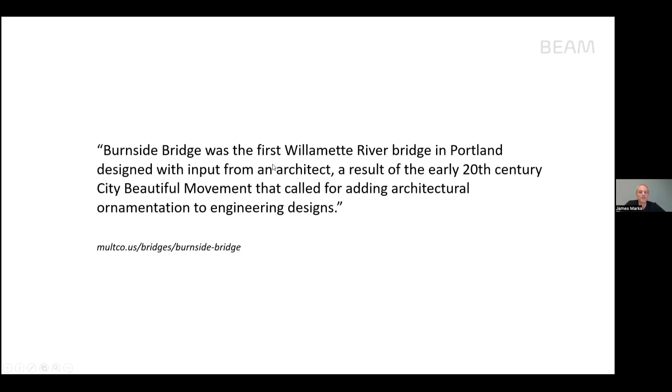The flowing lines of these bridges are responses to spatial conditions on the bridge deck and also to the bending moments on the structural members. The structures are deep where they need to be to resist the loads imposed by gravity, but are also shallow where they can be for the economy of materials. The bridge architecture is driven by the bridge engineering, and not the other way around.

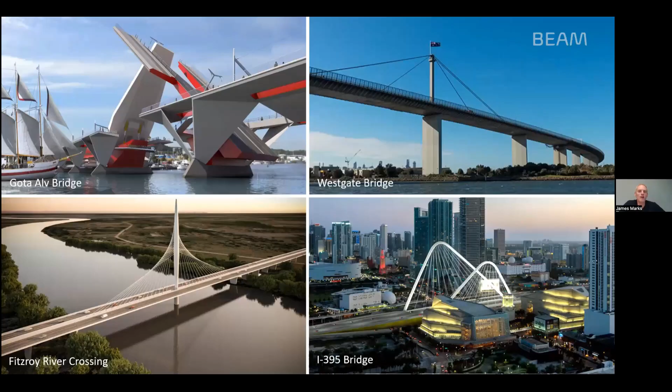For all our projects, as architects we need to understand the flow of forces, as well as how the arrangement of cables, pylons, and arches can affect the spatial qualities of the composition and the experience for bridge users. We work with bridges at different scales across all typologies and modes.

Increasingly, bridge owners are realizing the benefits of employing architects on very large infrastructure projects. The two bridges at the top of the page are the Long Beach International Gateway, a large cable stay bridge in California, and the Frederick Douglass Memorial Bridge, a multi-span arch in Washington, DC, both completed a year or two ago. Bottom right is the Mumbai Trans-Harbour Link, which opened last week. This is a 22-kilometre viaduct across the sea in India, where we were appointed to bring some design cohesion across proposals from 3 different construction consortia.

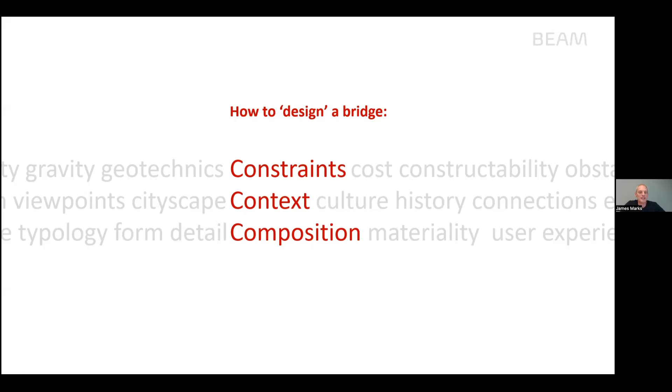If we had to distill what we do into 3 processes, this would be it: constraints, context, and composition, in that order. I'd like to explain what I mean by these criteria as they relate to bridge design specifically. I'm going to describe these in reverse order, starting with composition. The composition or form of the bridge should be tailored to respond to the specific set of physical constraints and the unique urban context of the site. For us, composition encompasses materiality, spatial qualities, user experience, form, detail, and anything that affects how you perceive a bridge and interact with it.

Unlike designing a building, bridge design is limited to a very narrow set of basic typologies. This is a slide from another project, but it demonstrates the 5 basic ways of bridging an obstacle, from shorter span simple beams and girders at the top of the page to longer span suspension bridges at the bottom. As you work down the page, not only do the spans get larger, but so does the cost. As bridge designers, establishing an appropriate structural typology is always our starting point.

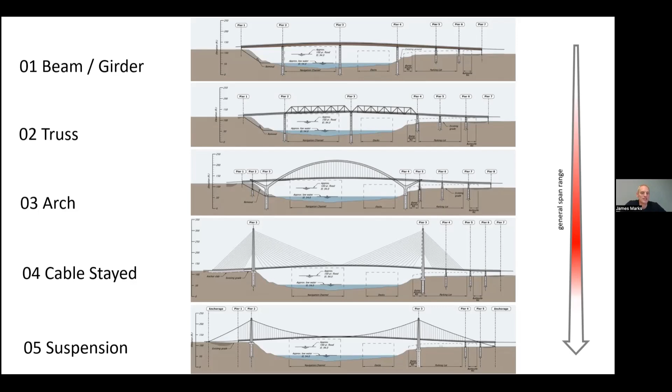The spans of the Burnside Bridge are somewhere in the middle of this range. We will most likely be dealing with trusses, arches, and cable stay bridges. The spans are too short to make a suspension bridge worthwhile, and the longer eastern spans will make girders an inefficient choice. So first from the pattern book is the truss.

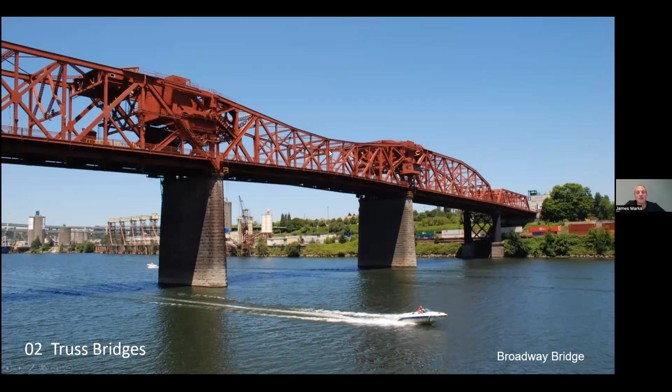This is the Broadway Bridge, which you all know, and this is probably the sort of structure that most people have in mind when they think of a truss: a lattice of braced members creating a ride-through structure. But trusses don't have to look like this. Here are some trusses from our own portfolio. You can see that the truss as a typology can be delicate, and it can be spatially beautiful. It doesn't have to be a clunky, heavy mass of members.

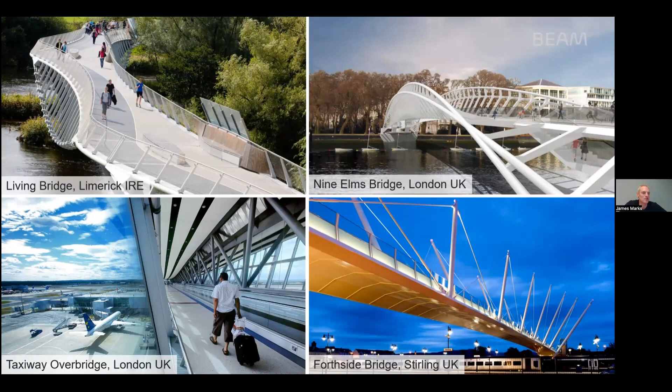And the same is true for arches. You all know the Fremont Bridge with its delicate braced arch profile, which dives below the deck to bounce back up to support the high-level highway.

But we used a similar silhouette motif for the bridge we designed in Boston, Massachusetts, bottom left. Top right is the Waaban Crossing in Kingston, Ontario, which has the appearance of a deck arch with the arch member below the deck, but is actually a framed girder. And bottom right is a light rail bridge we designed across the Bow River in Calgary. This type of structure is called a tied arch, where the horizontal thrust of the arch is resisted by tension in the deck, meaning that you only transmit vertical loads onto the piers.

The tied arch is likely to be a structural typology that would work well for the long east spans at the Burnside Bridge. And finally, to cable stay bridges.

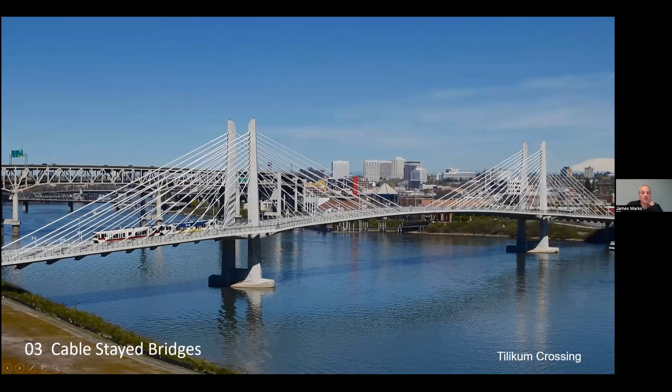The Tilikum Crossing, which you all know, is a fairly conventional cable stay bridge form with stay cables hung from vertical pylons supporting both edges of the bridge deck. But again, cable stay bridges can also offer extraordinary opportunity for expression, from the curved pylon of our bridge in Bahrain, top right, currently under construction, to the multiple masts of this bridge for the BBC in Salford, bottom right.

The same structural diagram can also work with solid members in place of cables. Bottom left is a bridge we designed in Melbourne, Australia, which is a cable stay bridge in principle, albeit with solid stays instead of cables.

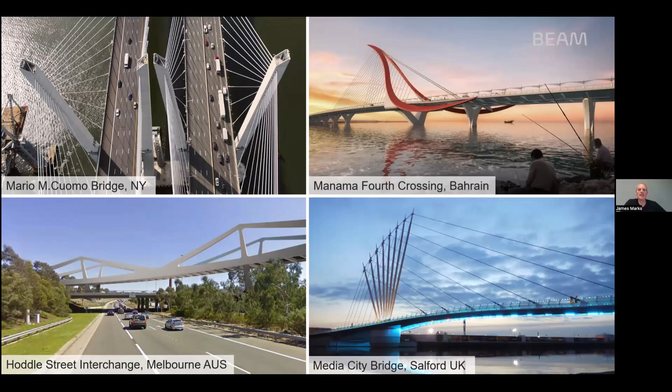Once we've established the basic form of the bridge, we then look at the detail. By detail, I don't just mean finishes such as railings and concrete surfaces, but more fundamentally, the shaping of the structure itself. We were commissioned to undertake the reference design for this bridge in New Jersey.

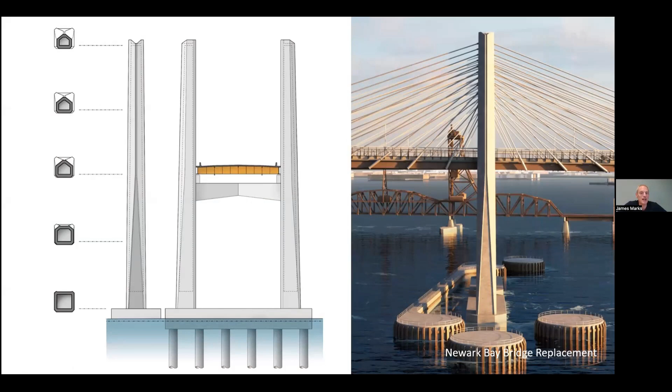It's a cable stay bridge supported from a pair of large pylons. Part of our role was to investigate how the light falls across the structure and shape the tower, not only to resist the forces acting on it, but also to break down its visual mass to give it this elegant appearance.

And similarly, for the structure of the Frederick Douglass Bridge, the arch has a tapered form which evolves as it curves overhead. From a profile that is deep at its root, where we're resisting shear forces, to a wide cross-section at the apex, where we're resisting out-of-plane buckling, all with simple geometries that are easy to define and fabricate.

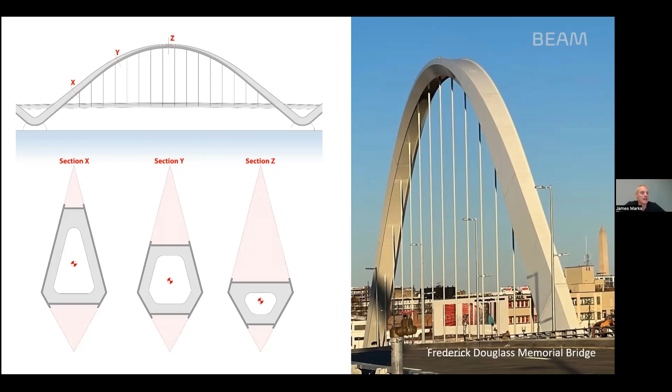But the composition of the bridge, the arrangement of the structural forms, all evolve from the individual constraints of the site. The Burnside Bridge has a very particular set of physical and geological constraints and a complex relationship with its urban context, which I'm going to hand over to Keith to describe next.

Keith, are you there? Are you on mute? Okay, sorry, I couldn't find the unmute button.

So this diagram isn't massively accurate, but as James says, it demonstrates a complex array of constraints. There are obstacles to span, no-build zones, clearances, maximum height moratoria, minimum height envelopes, and connections to make with geometric and operational issues.

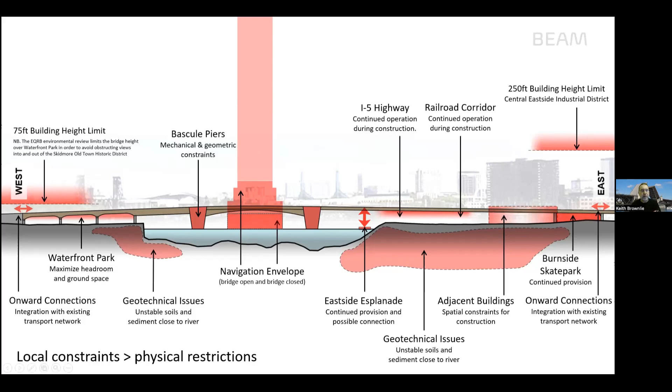I won't go into any of those. The most important constraint on this project is that it's fundamentally a life safety project. It's to be an earthquake-ready bridge, as you've heard—a seismic problem to navigate.

So you'll see words on the right which say the I-5 and railroad corridor, and beneath it a liquefaction zone, which means in an earthquake it's turning to liquid. All of that means you can't, or really shouldn't, put your feet down. So we have very limited opportunity for bringing structure to ground.

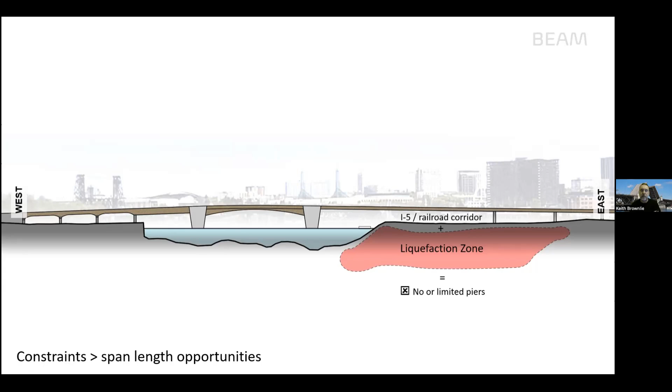If I could show you a pictogram, what that really means is this: on the east side of Burnside, when there's an earthquake, the ground turns to soup. And you need something long span to span over that.

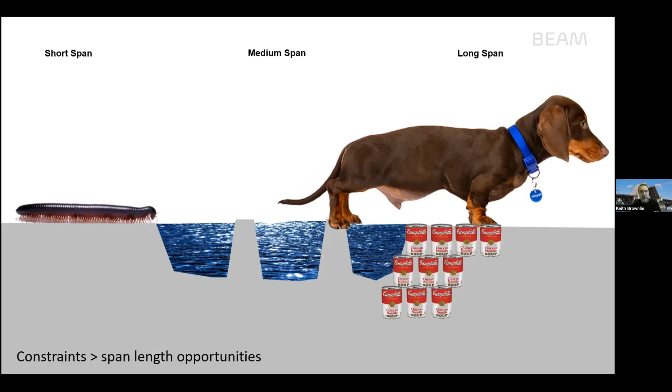Conversely, you don't have that issue, at least to the same extent, on the west side, on the left, so you can put your feet down as often as you like. Hence the millipede can exist on the west, but you have to have a dachshund on the east.

So if you convert that into a diagram—and to be clear, these are not designs, these are diagrammatic typological responses to that constraint—you can have short spans on the west, you need a medium span in the center, and you absolutely must have a long span on the east side.

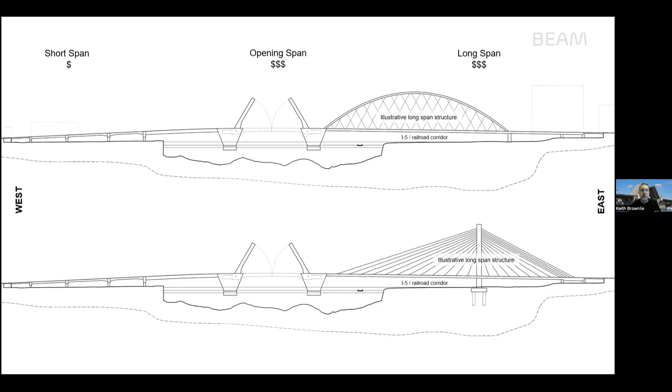And with those short, medium, long spans, you get increasing dollars. Unfortunately, the medium span is really two short spans, but they're very long when you're talking about opening bridges, so I'm afraid the dollars go up there as well.

I've talked about physical constraints, but of course there's a whole host of architectural and urban design issues at play as well. We're not preempting what might be the case, but you have real physical and cost constraints that drive you down a route on the east side, while on the west you can do what you like, notwithstanding other physical and urban design constraints. But realistically, if you're going to add a dollar sign to each of those spans, that takes some justification.

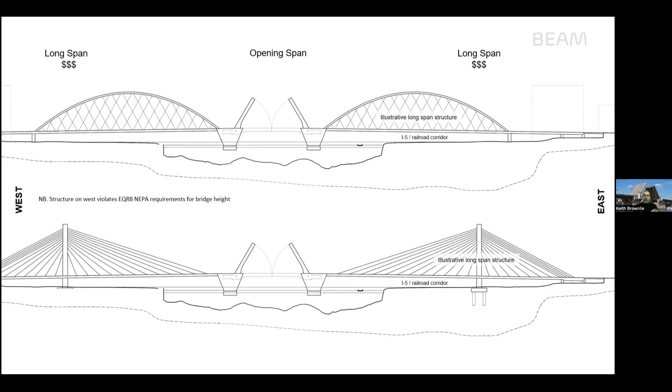So we've done this in reverse order, but in every case, what we do is about context. That's what makes architecture. Constraints make structure or make utility, but context makes beauty and, more to the point, makes appropriateness.

City of Bridges, Bridge City—it might not surprise you that because we only design bridges, every town we go to considers itself to be Bridgetown or the City of Bridges. But this is a significant river with a significant portfolio of bridges, historic and modern, crossing it.

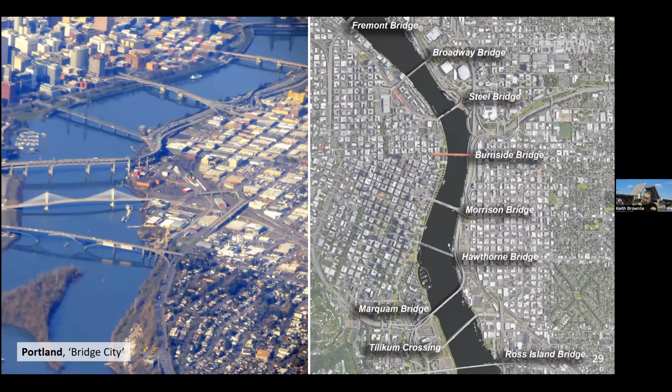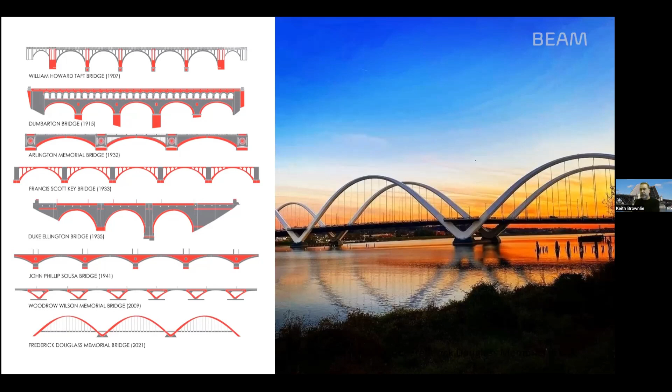They're not to scale—our bridge is much bigger than all of those. I wouldn't say it designs itself, but one would be hard pressed to stick a cable-stayed bridge in that collection of arch bridges. If you go to the next slide, however, this is Portland's portfolio.

It's a series of interesting bridges, but if you color code those typologically, there's a lot of colors, which means there's a lot of types. So the takeaway is we have a free hand, we believe, in typology terms, notwithstanding the fact that there are only six typologies, as James explained earlier. But we're not driven by one type or another.

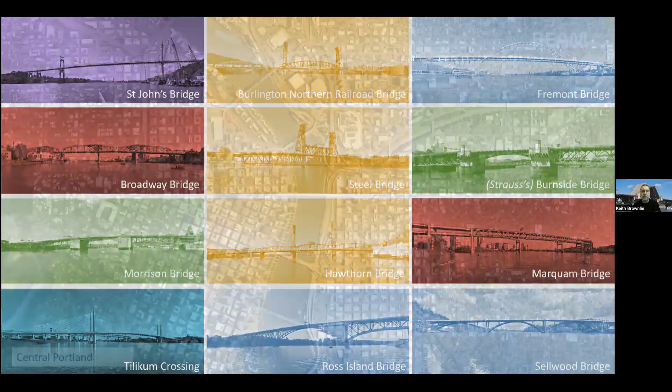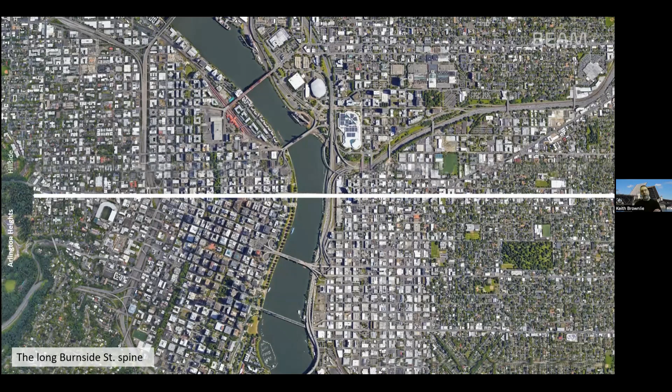So there is Portland. You might recognize it. The next slide shows you the significance, we believe, of Burnside. It's very interesting, Burnside. It's terminated by the hills on the west side, but it's almost sort of curvature of the earth on the east side. But it's a real spine—it's the spine of Portland's book.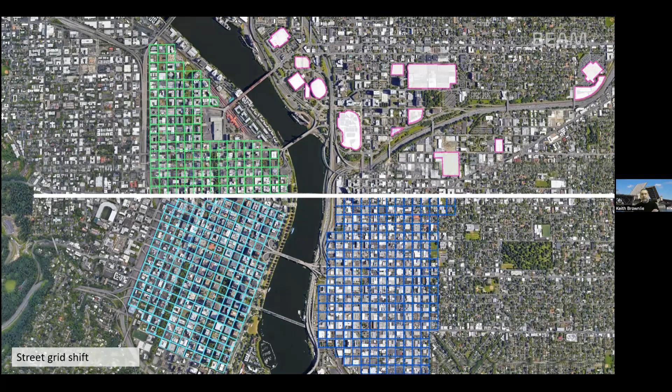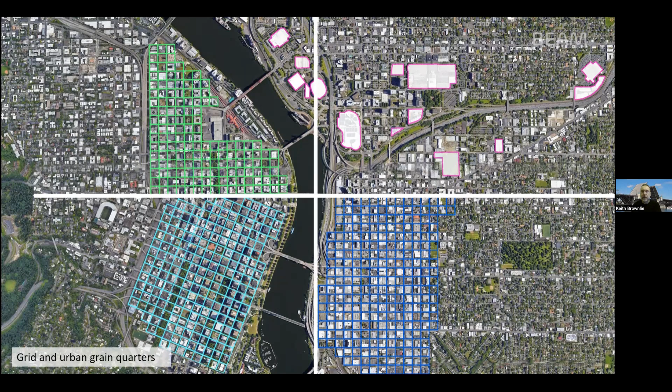The next slide shows you that when you emphasize the grids, you can see the way the grid shifts on Burnside. It's the center. And if you take a vertical through that, you understand it's also the pivot of the grain of the city. You go from neighborhood to city center, downtown, and then you get the greater scale up on the northeast. And there is Burnside Bridge sitting at the hub of it.

So I'll make a mention of scale. In any city, if you're building a big bridge, a bridge of scale, it's going to be visible. It's going to take on—and I use this word not lightly—it has the potential to take on a sort of iconic form just by its very visibility. And if you're going to do that, you kind of want it to be in the place that it should be. Our contention is that it very much is in this city—that location deserves, or can handle, its visibility in the public space.

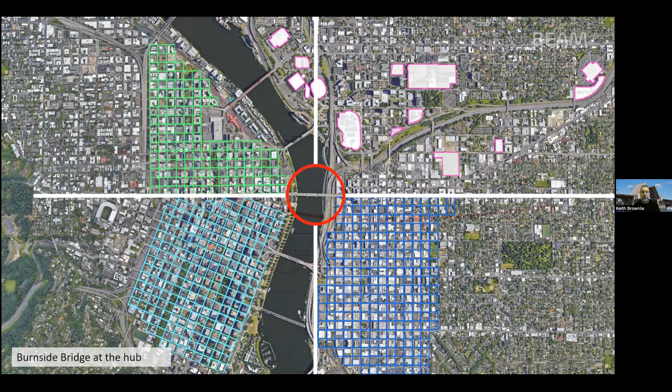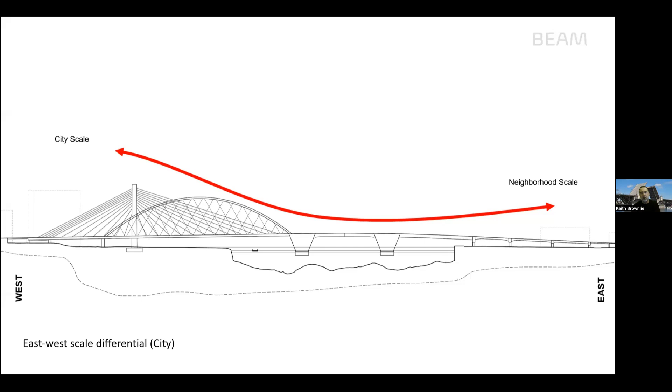Portland is very interesting to me because the west side is where the tall buildings are, the west side is where the commercial density is, and it looks like this might be, in any other place, what this bridge should do: big on the west, low on the east.

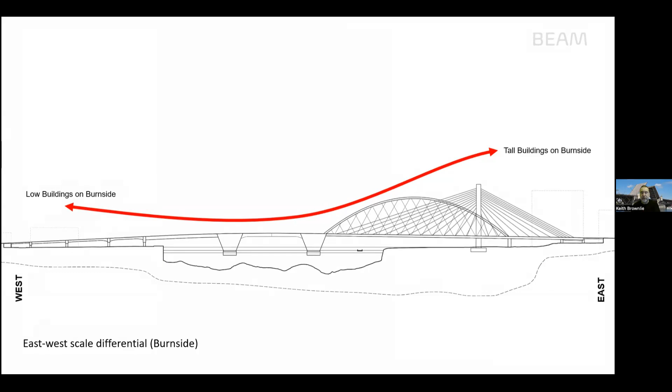But that's not what happens on the Burnside corridor. This is what happens on the Burnside corridor: there's a pair, or potential cluster, of tall buildings on the Burnside corridor on the east, and of course the historic core on the west side is height limited—completely opposite from other places in the city. So the constraints I discussed are backed up by the physical context of the place as well.

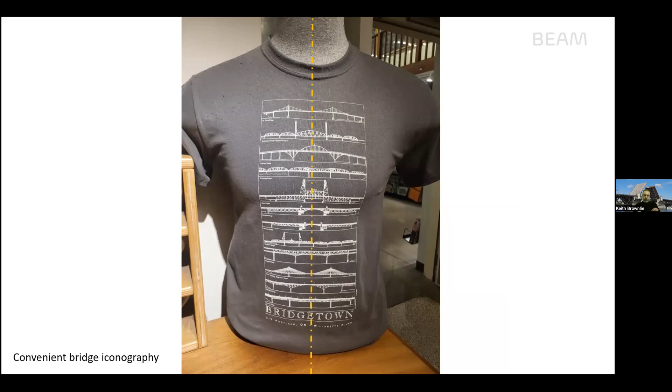Last time I was in Portland, I went looking for this T-shirt because I knew it would exist, and it took me all of about 3 minutes to find one in Powell's City of Books. This is always the case: here are the bridges all lined up very nicely with a central axis through the middle, saying symmetry, symmetry, symmetry—all bar Hawthorne, which is a bit of a left-field aberration. That's not the reality, of course.

The reality is this: it's a very winding, meandering river, and the relationship between those bridges is not linear. They all exist in space relative to their own context. Some have context relative to other bridges, but there's no foreshortened longitudinal axis through the river that tells you each of those bridges is part of the same stack.

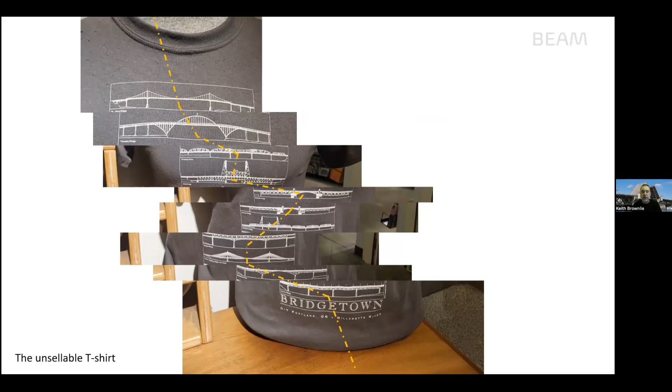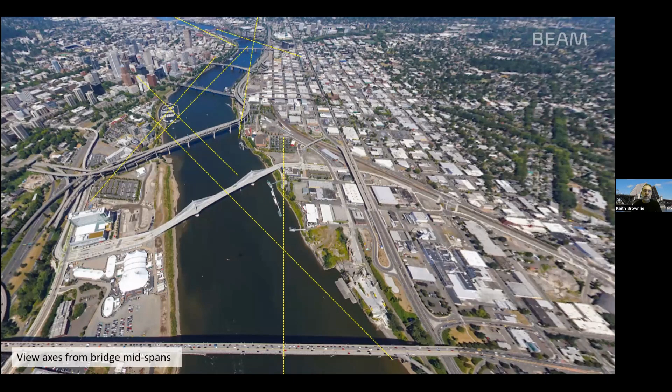My observation was very much that the bridges operate as part of an urban tapestry. They appear in places from the land where you don't know—well, it's pretty obvious because they're bridge-type structures that they must be crossing an obstacle, which you know to be the river. But nevertheless, they exist amongst tall buildings, amongst industrial context, and amongst landscape. They form part of an urban tapestry, which I think is a very interesting scenario that starts to question the idea of the bridge-to-bridge relationship being more important than the bridge-to-building or bridge-to-urban context relationship.

So here is one of those more prevalent relationships between bridges. Those three bridges have an alignment on the river: Hawthorne, Morrison, and Burnside, which is slightly, I mean it's not exactly parallel to the other two, but it has a kind of centralized relationship. If you apply those structural diagrams that I showed you of a cable-stayed bridge and an arch bridge onto the east side...

Next slide. You see something quite interesting, I think particularly on the right hand there, where you get sloping off the page, the cables of a generic cable-stayed bridge. And again, I'll reiterate, these are not designs, these are building blocks, if I can put it that way. But you see that in both of those cases, more so in the case of the cable-stayed bridge, that you retain a symmetry on the river because a bascule bridge has visual mass that overwhelms any lightweight structure that might be happening on one or both sides of the bridge.

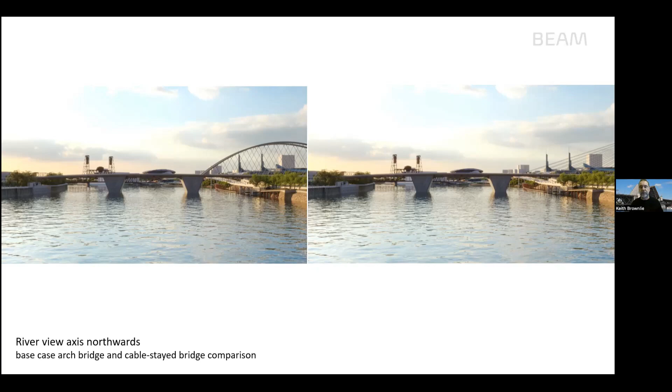Next slide. But this is interesting, at least it is to us bridge nerds. Because of the directional change in the river, the view south from Fremont through Broadway, through Steel Bridge, doesn't look at Burnside Bridge at all. It doesn't look at the river at all. It looks towards the land.

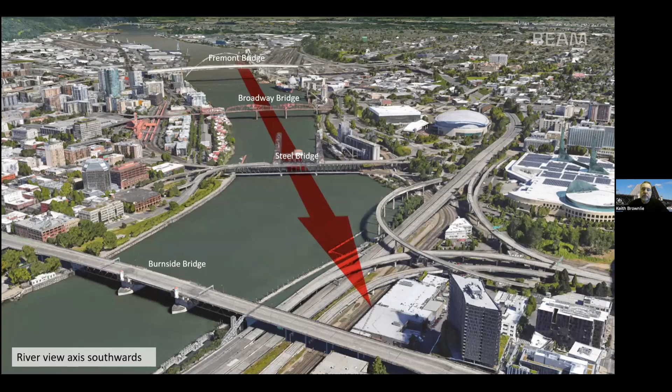Next slide. So if you take a slightly elevated view down that same corridor with arch structure and cable-stayed structure generically, you see something else happens. You can join up with that axis, but you're over land, which so happens to be that there's a requirement to have a long span over the land in that position.

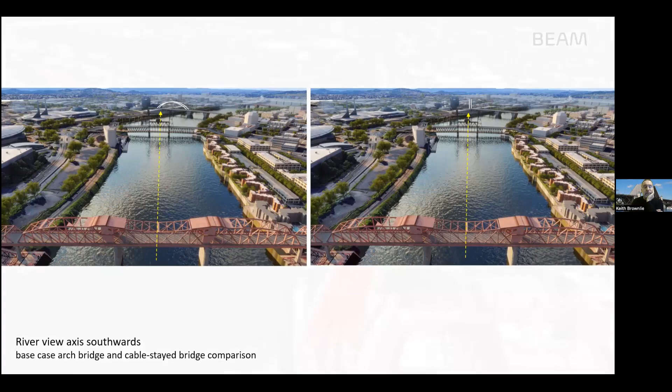Next slide. Well, there are other axes as well, of course, because this is not only a river bridge, it's got a substantial requirement to span over the I-5 corridor and the railroad. So when you are on I-5, particularly traveling north, let's have a look at what that looks like with those same two diagrammatic parameters. I think this is very interesting because suddenly those structural types seem to have a meaning that's relevant to the highway, and a vast majority of travelers passing under this bridge will be in a vehicle, not on a boat or on any other river craft.

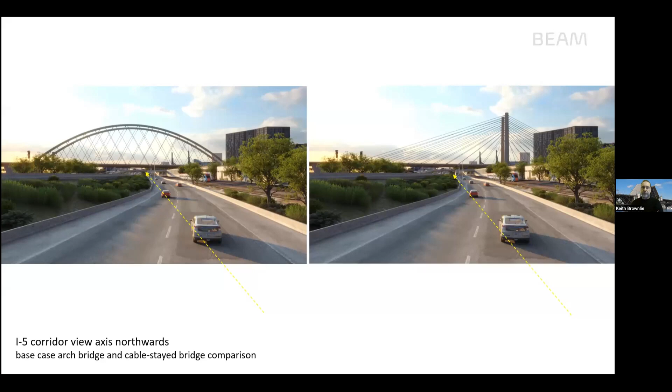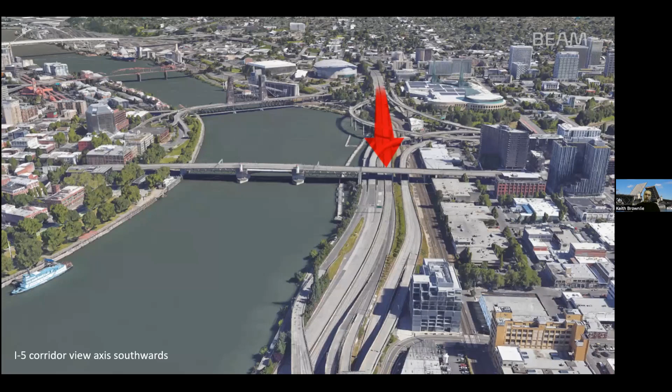And that, because I-5 takes a bend as well, it pretty much goes centrally, if you're heading north, underneath the apex of an arch, which is a kind of interesting consideration. Southwards, it's not quite the same, but you do get the same effect as those on-ramps and off-ramps to I-5 come down. I think we can see a view of those as well. So you see these structures sort of take a meaning that's connected to the river, but it's not integral to it necessarily.

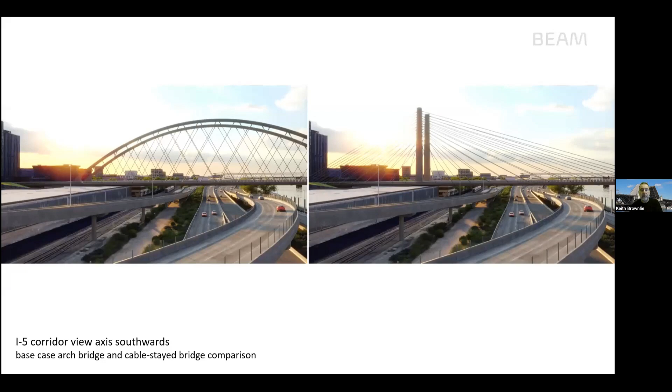Next slide. And we kind of wonder whether or not, again, this is not a design, this is just a diagram, but that you start to set up potential conversations between significant parts of the city. There's a conversation there between, in this case, the cable-stayed mast tower and the big pink.

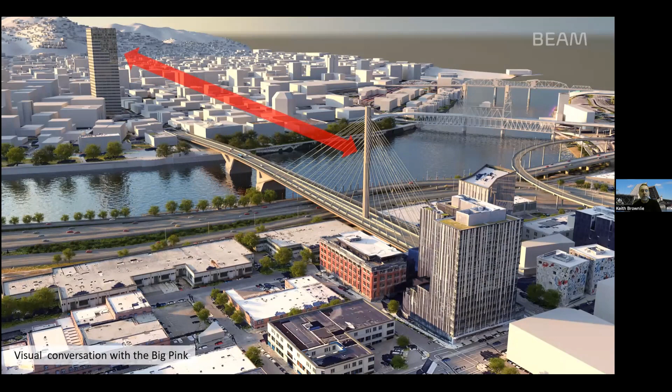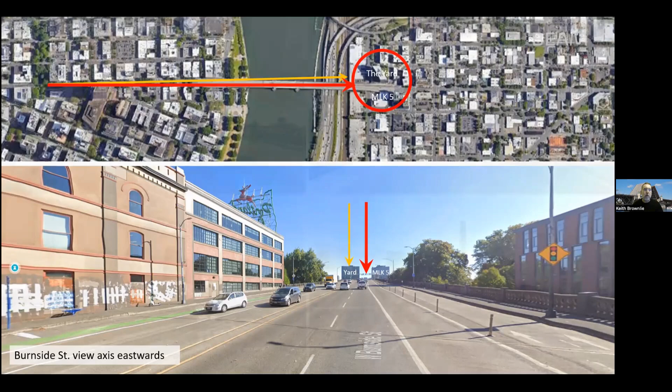Again, more diagrams, but you can see what's at play here is that we are playing with that gap, saying, do you frame that gap? Do you portalize that gap, or do you occupy that gap? Those are all things that come into play when you're thinking about the structural type or structural arrangement of the type might be.

One consideration was the views and existing conditions of today may change in the future. It also talks about scale - if the scale changes with continued Portland growth, does that change the approach? But I think you kind of teased into that a little.

And then the other thing paired with that on large infrastructure is the next question - I think Jericho or someone asked about Burnside being turned into a couplet, so it's one part of a couplet now that it wasn't originally. So is that all eastbound at this point? No, it's two-way. Are any of these large infrastructural discussions going on at this stage in the design - city code heights on the west side, or transportation changes, couplets, etc.? Are those discussions set now, or still in motion?

As far as input to your team, input to HDR and Beam, that would be ODOT, PBOT. So these infrastructural questions, are they set pieces?

I'll respond to that constraints question, and then try to hand it over back to Beam. From a context setting standpoint, as we're finishing up the environmental analysis phase this month, we had to consider the historic downtown district on the west side, and that played a prominent role in establishing a low profile structure. We went through discussions for Section 106, Section 4F - these federal requirements - working with National Park Service and FHWA, and the result was a mandate, not an option, to keep the Burnside Bridge's deck surface effectively where it is and unencumbered by structure above.